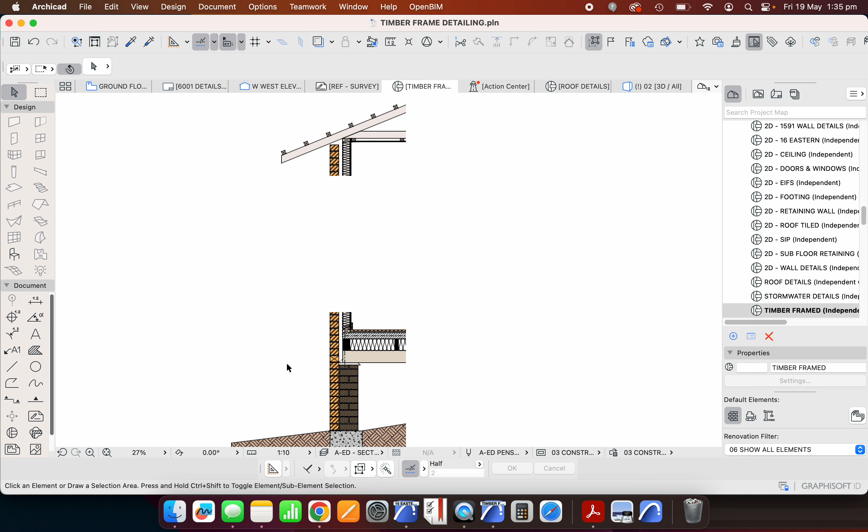Look now at this 2D detailing and how we can change and add to it with some different types of construction or material systems. So we've extended this down from a concrete raft slab to be a suspended timber frame floor, or a traditional framed floor, we could call it.

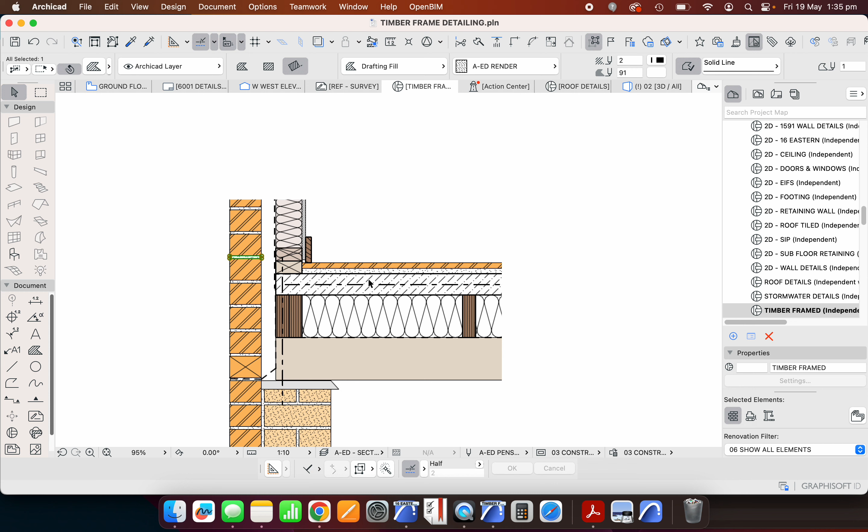And we need to change the wall system here. Instead of being brick veneer the whole way up, we're also going to make this an autoclaved aerated concrete or cement system. So I will do this all the way from the brick base all the way up. I can move this for now or shrink this for now if this is confusing in any way.

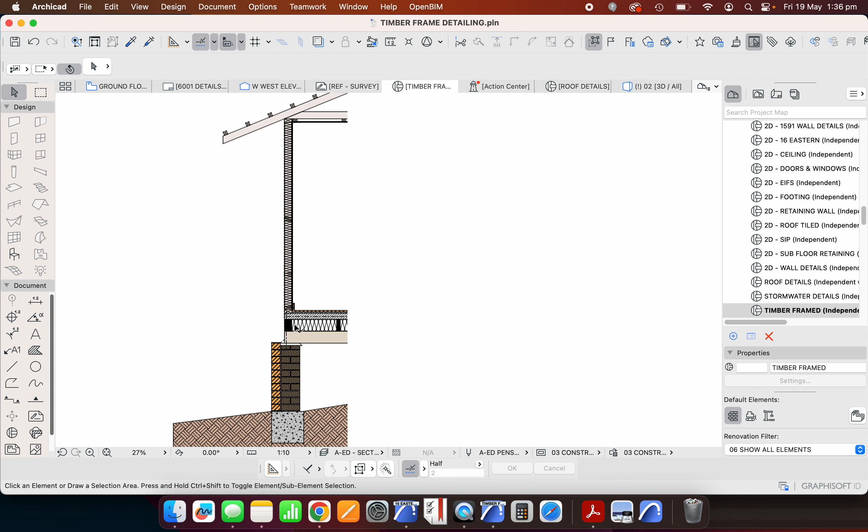So we still have our timber frame wall. This looks a little bit strange because I had to chop it before to move it down. So I'll extend this back up. So we've still got our wall just as we had before. The difference is we're going to have the Hebel on the outside. So I'm going to take a copy because it's the same product that we can use for the wall and for the floor.

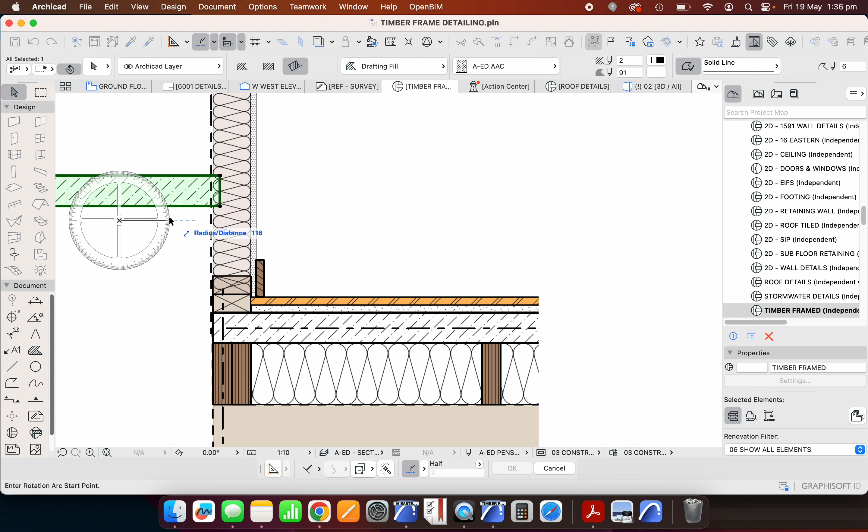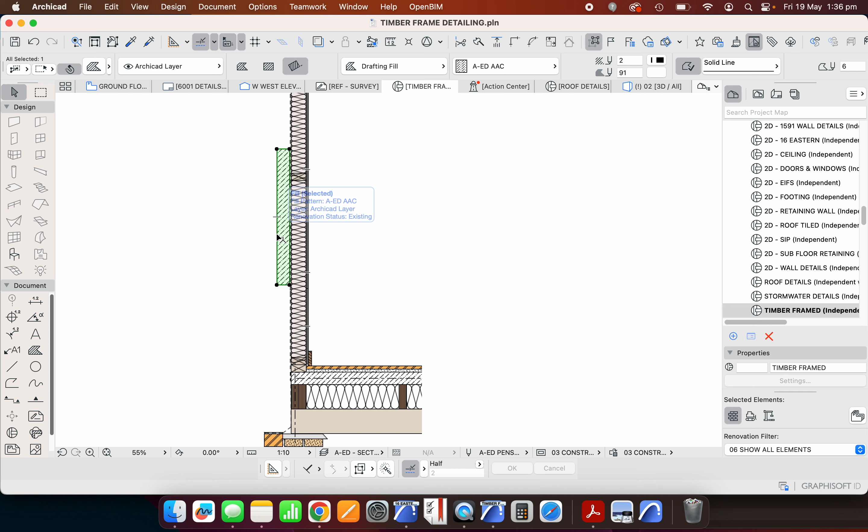Now I could add it directly to the outside of the frame, but it wouldn't create a very good system. Partly that would require the stud wall to be at the right spacing to allow for the frame to be fixed to, but it also wouldn't provide enough insulation. This sarking also works best if there is an air gap on the outside of the sarking. So we're going to add battens on the outside of this frame.

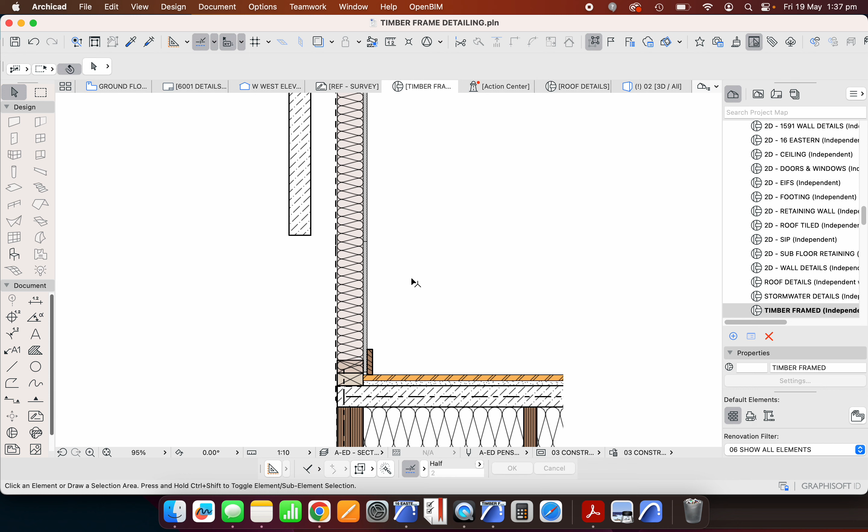Now when we're adding battens, we could either have battens in a vertical or a horizontal orientation. My preference is generally to use battens vertically, which allows moisture to be extracted from the building better than if it's horizontal. When it's horizontal, of course, the battens are blocking the sarking all the way down. So if we can do a vertical batten on the outside, that tends to work better. So I'm going to grab this stud, move a copy across.

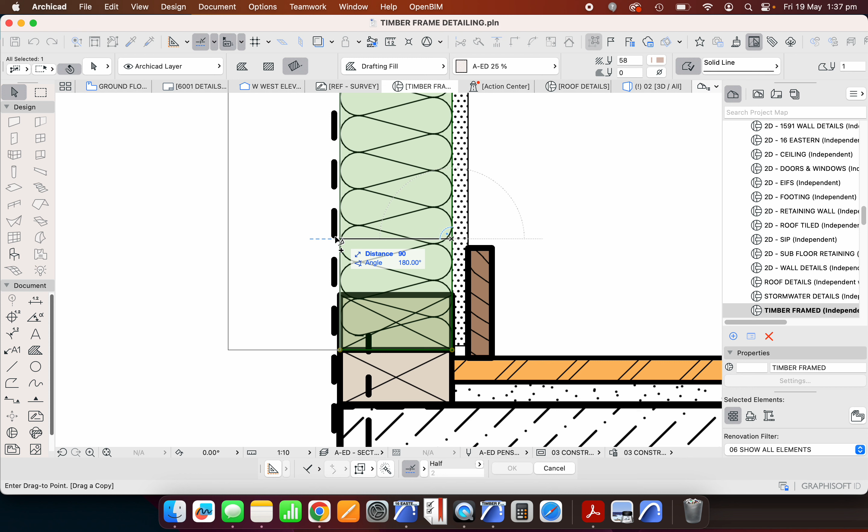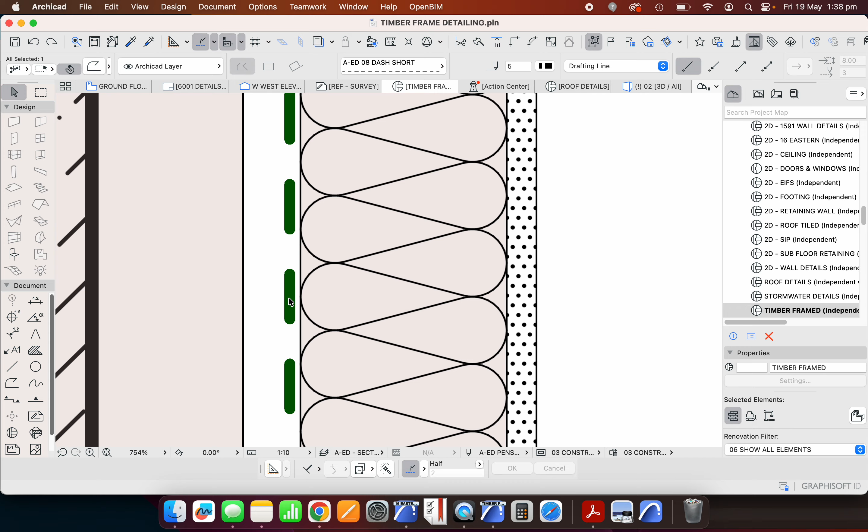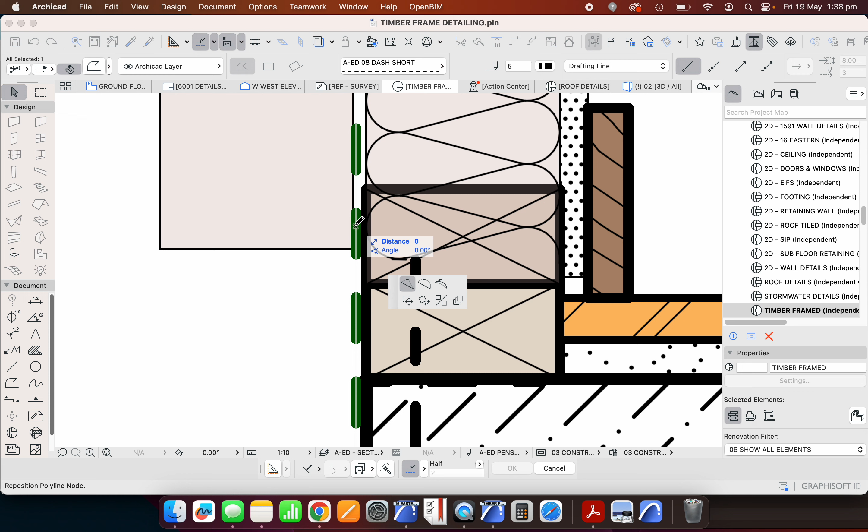Now, of course, in reality, we have this sarking that's against the frame. Try to grab this in a different spot. So the sarking's not very thick. The sarking's less than 1 millimeter thick, generally speaking. And the batten, of course, fixes directly to the frame as well. But instead of just having it squished, what we will tend to do when we're doing detailing is leave small gaps. And by leaving these small gaps, we're able to better see or better understand what it is we're trying to represent.

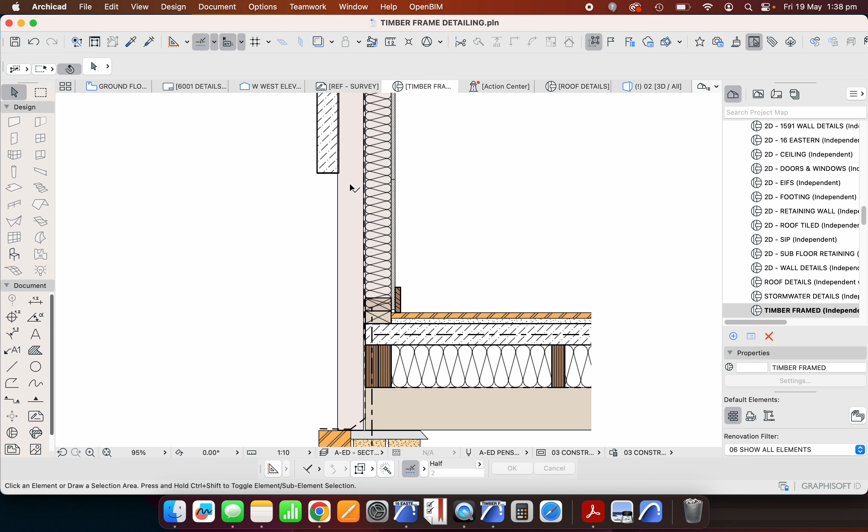So in this case, the batten will run all the way down. Now I can choose where this wants to stop, but at the moment I'll make this run all the way down to the bearer. We also don't want the batten to necessarily be 90 millimeters. So typically this could be 35 millimeters or 45 millimeters. Now again, it doesn't really matter how I represent this. So I could measure this 45 from the outside of my stud, or I could measure this 45 from the inside or outside of the batten.

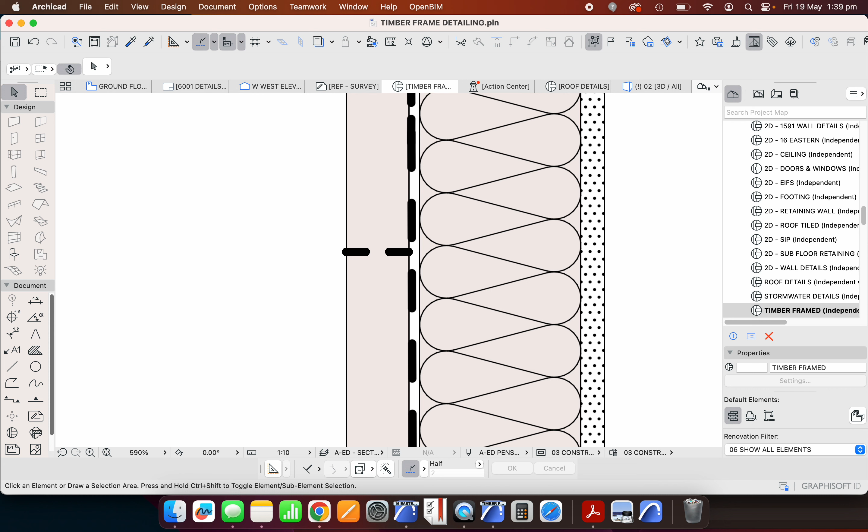Typically I'll use a batten that's 35 by 45 or something like that. It's hard, at least in my local area, to be able to buy battens in this size. So typically, if I was to be building or very heavily specifying or annotating how this was to be done, I might be specifying a 90 by 35 batten. So wherever the panels join, I might have a 90 mil batten, so it's wide enough that it can be easily fixed to.

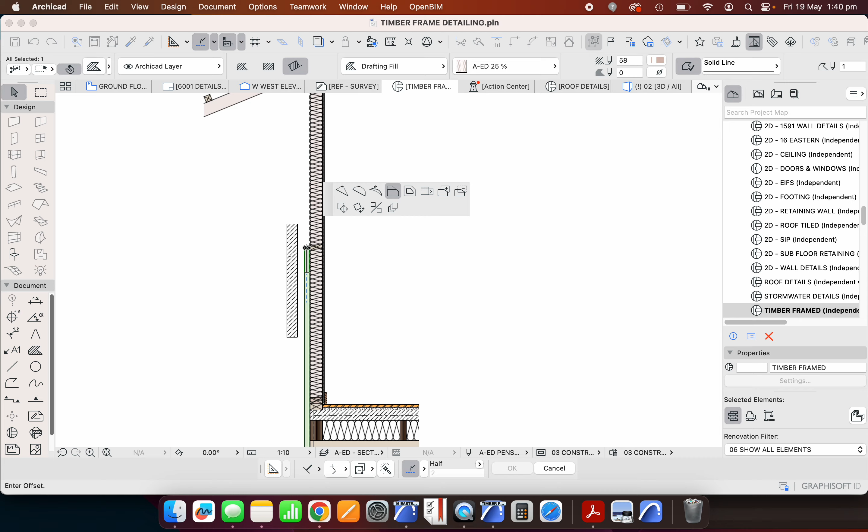And then if I need intermediate spacing for the support of the cladding panel, that might be a 90 by 35 stud or piece of timber that's ripped in half, so it becomes a 45 by 35 batten. So typically that's what it would be. That's how I'd annotate it. So I'd call it a 45 by 35 batten at whatever centers or spacing I need that to be. So if that's 600 centers, 450, 400, whatever suits the way that I'm doing this panel.

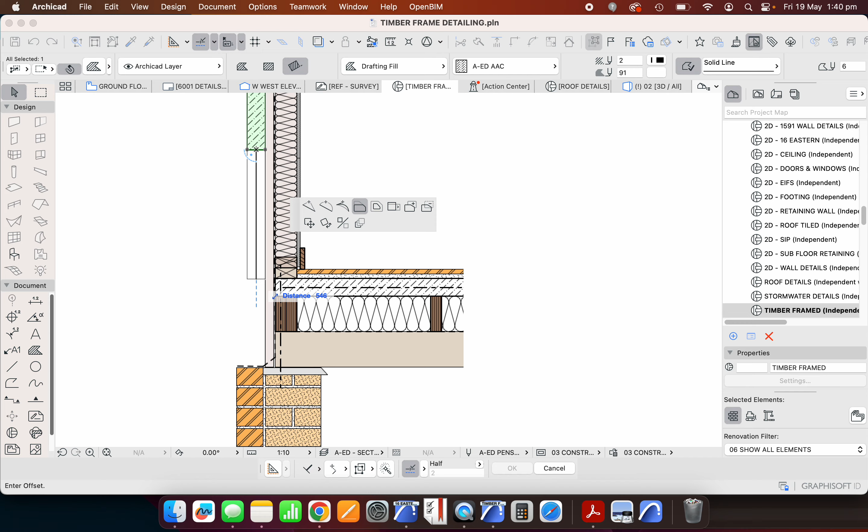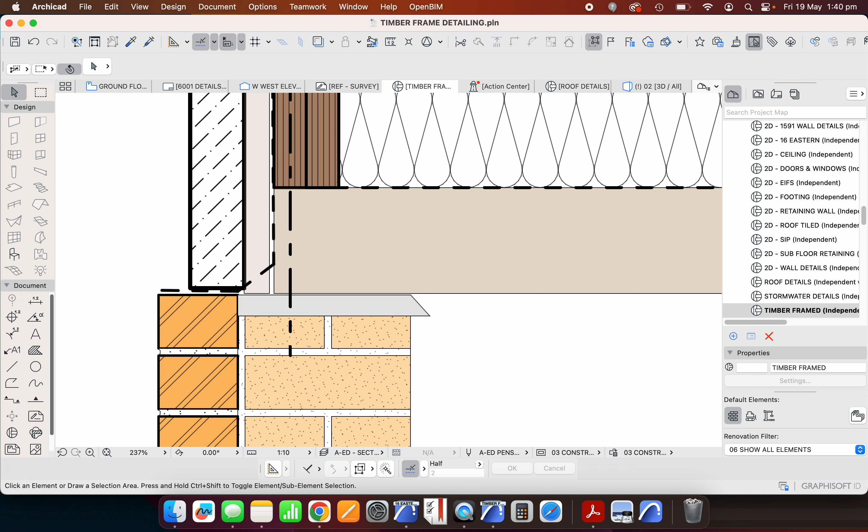Typically I'm going to leave a small gap at the bottom. In this case, I don't need to have a mortar joint between the brick and the Hebel panel, and so the small gap that I might have underneath is acting as one. And I could, if it was necessary, have flashing, hard capping might be another way of saying that, which covers the edge of the brick, goes back behind the batten, and goes up this wall.

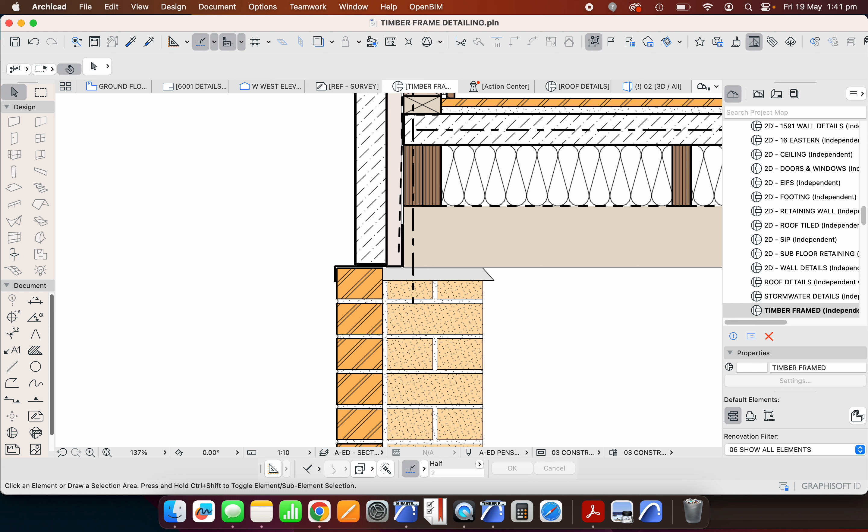Normally that's going to be going up 150 millimeters, in which case I might have the sarking stopping over the top of the capping, and that means I've got a nicer, neater finish because it's a folded, maybe Colorbond capping instead of sarking or a damp-proof course that's running outside that relationship.

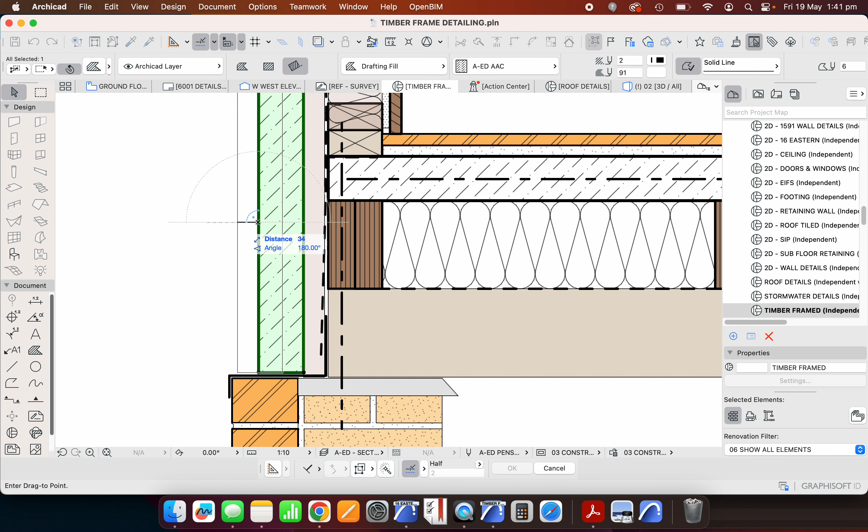Now finally, I could say I don't really like the relationship in which the wall, the brick wall, meets the Hebel. So I could fix this in a couple of different ways. I could use a larger batten in order to push the Hebel all the way out so it lines up with the outside of the brick. Or I could potentially just move all of this information back across.

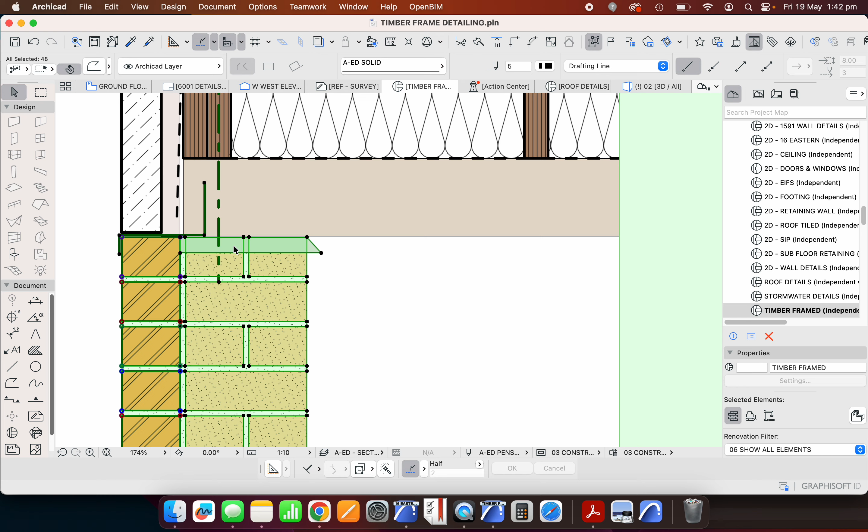So I could be pushing this brick wall back in alignment with the Hebel. Or of course, another way of saying that would be taking the bearer further out in relationship to the wall. Because instead of needing the 50mm cavity that I had before, I'm creating this just with my 35mm batten. Now push this back into place. And now, very quickly, we've changed this from a brick veneer wall to a Hebel clad wall.